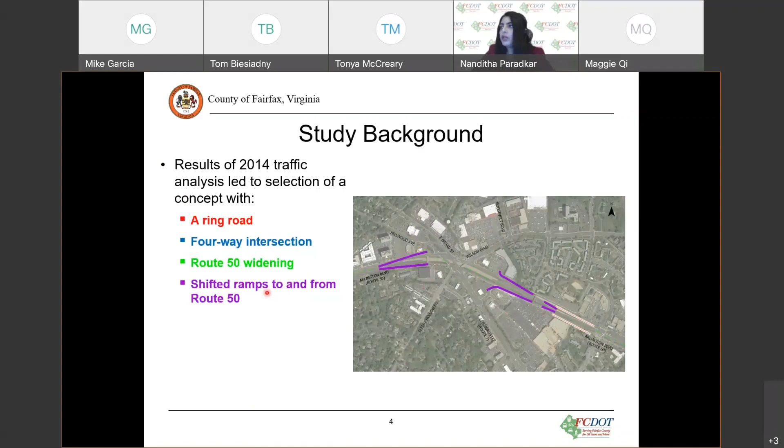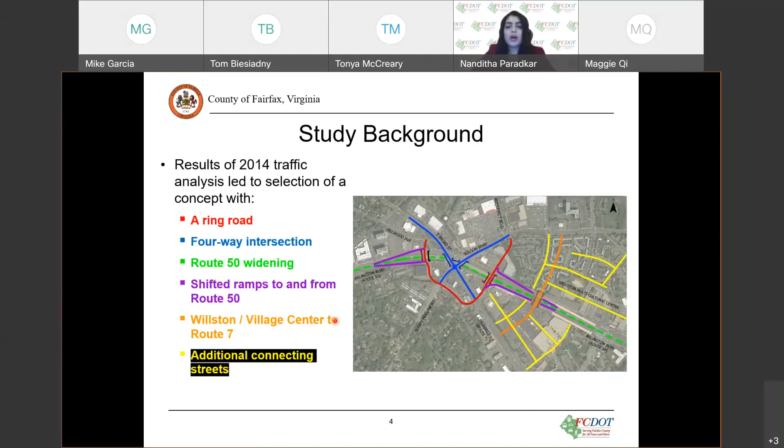Shifts that connect Route 50 to the new ring road on each side of the new intersection; construction of a new road connecting the Willston Multicultural Center and Village Center to Route 7; and additional local streets to better connect the road network with redevelopment. These transportation improvements will also provide and enhance bicycle and pedestrian facilities in Seven Corners.

The intent of the study is to find transportation improvements by looking at the interim conditions between the improvements to be constructed, assess property needs and constructability, and develop more robust cost estimates, eventually helping to enhance funding applications and continue to apply for funding.

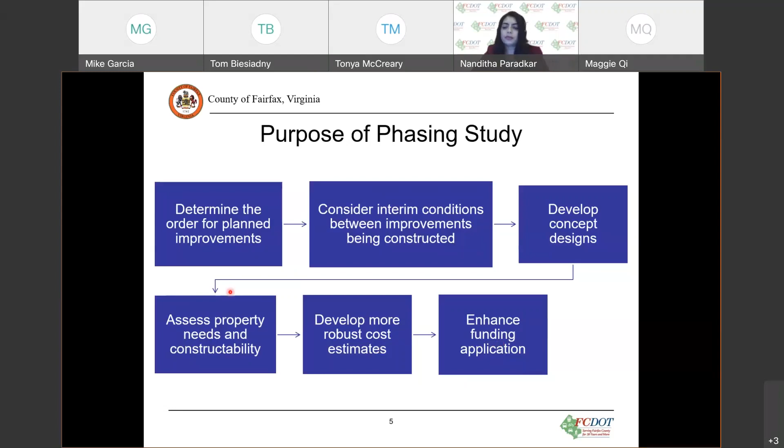The process steps to conduct the study to determine the order of improvements are to assess and evaluate travel conditions in the area for motorists, pedestrians, bicyclists, and transit users, reflecting pre-pandemic conditions. This step was completed and the findings were presented during the first round of outreach, completed in February.

The next step was to develop and analyze two future build conditions, with 2045 being the horizon year and an interim year with some improvements in place. We are currently working on that analysis and the initial phasing of improvements, which I'll be presenting shortly.

After receiving public and stakeholder feedback through this round of outreach, we will continue to develop the logical and feasible order of improvements, assess property and right-of-way needs, and develop conceptual plans along with cost estimates. The final findings, along with the preferred concept, will be presented to the public in a third round of meetings to be held in spring 2022.

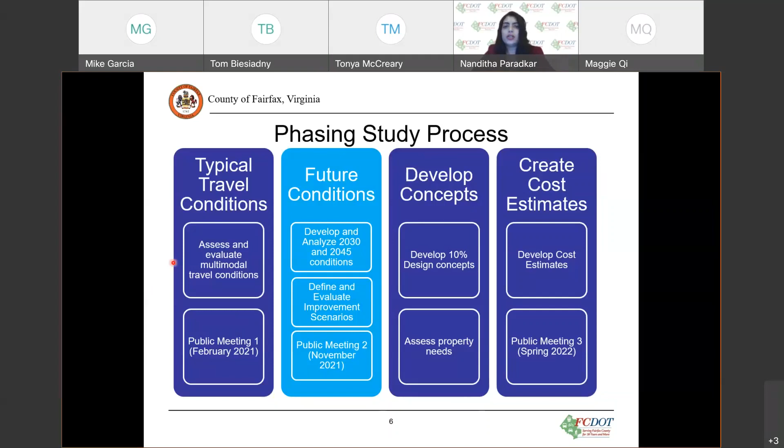The next few slides summarize the outreach from the previous round of public meetings in February. Two meetings were held, in English and in Spanish, earlier this year. The existing conditions analysis, reflecting pre-pandemic conditions, was presented.

As part of our outreach efforts, we gathered feedback about the locations and timing of congestion in the area, where people want to walk or bike, and the means to access these locations. We reached out to around 300 home and business owners, 40 religious organizations, 12 nonprofit and social service organizations, and 12 recreational centers and schools, requesting feedback through various channels including the project webpage, social media, and survey.

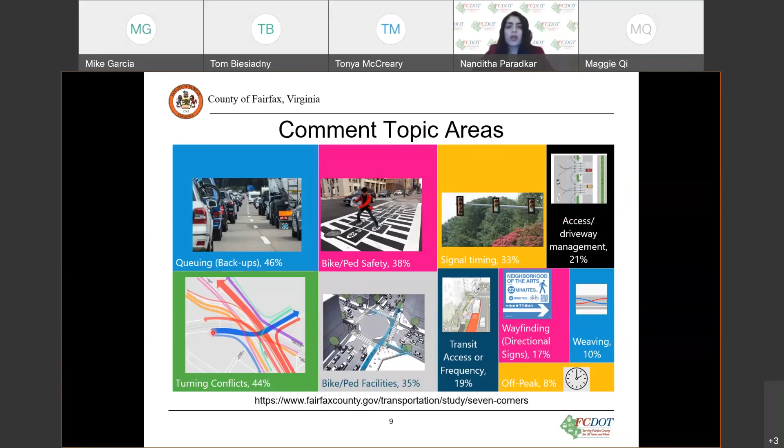There were around 38 written comments from the survey questions and online sources. Resident concerns were categorized into different groups based on these comments: queuing concerns, turning conflicts, bicycle and pedestrian safety and facilities, signal timing, extended wait times, access issues, conflicts between vehicles and bicyclists, transit frequency, unclear wayfinding and directional signs, and lane-changing issues caused by the many roads intersecting here, with the majority of concerns related to queuing and turning conflicts. Detailed outreach information is also available on our project webpage, linked here.

Here's a recap of the typical conditions analysis from the last round. This graphic shows the complicated traffic flow through the interchange area during the afternoon peak, when more people are traveling. We refer to this as a spaghetti diagram, which shows the major conflicts and converging points as you travel through the interchange. The major movements in the afternoon are westbound Route 7 towards Falls Church and westbound Wilson Boulevard to Route 50. There's also another major conflict and merge point where southbound Route 7 and Hillwood Avenue come together in the interchange area, which has one of the pedestrian paths with the longest walking times.

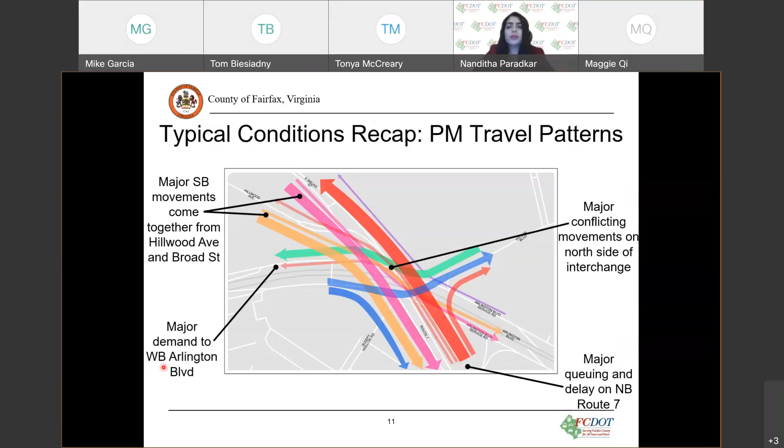With all these heavy converging movements, and people wanting to cross and waiting a long time, the ring road concept will help break down these movements by moving them to the outside, which will also help create a safer condition and minimize conflicts between vehicles, pedestrians, and cyclists, while allowing the inside four-way intersection to be more comfortable for people to walk and bike through.

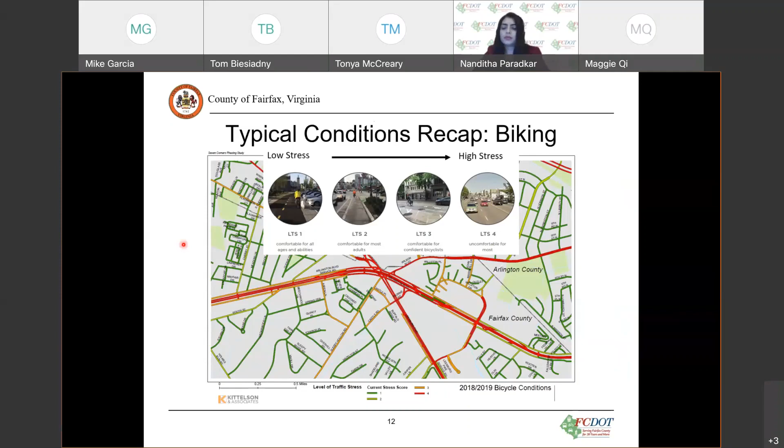Substandard sidewalks are indicative of sidewalks that are not consistent in terms of width, materials, or missing landscape buffer, or in some areas are relatively high, which increases the potential for vehicle-pedestrian conflicts along pedestrian routes. Some ADA pedestrian ramps in the area either don't meet current standards or are not provided. So the focus is definitely to address these issues as we reconfigure the interchange.

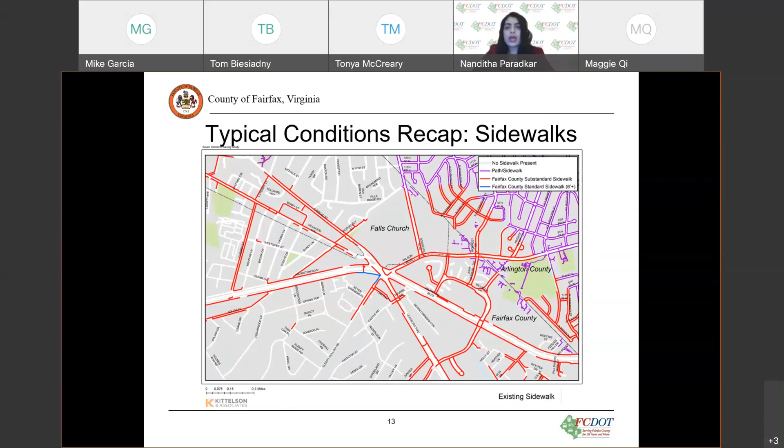Moving on to phasing concepts and analysis. Based on the typical conditions analysis, future travel demand, feedback, and constructability, we developed and analyzed multiple phasing scenarios in order to identify the most critical pieces of infrastructure to serve the community, as all of the planned improvements in Seven Corners cannot be built at the same time.

For an initial phase of implementation around 2030, one of the options we looked at is the ring road on the west side of the interchange as scenario 1. The improvements for this scenario include a ring road connecting Route 7 and Broad Street in the north, terminating at East Broad Street, with a slightly realigned East Broad Street segment.

Hillwood Avenue would terminate at Ring Road, with potential removal of connections between Hillwood and the interchange. There's a shift of the bridge over Route 50 a little to the west, and a bridge likely requiring demolition, with slightly adjusted ramps to and from 50 on the west side. We're also looking at potentially removing Castle Road access from the ring road with this concept, and we'll work with the community closely and request feedback about this possible closure.

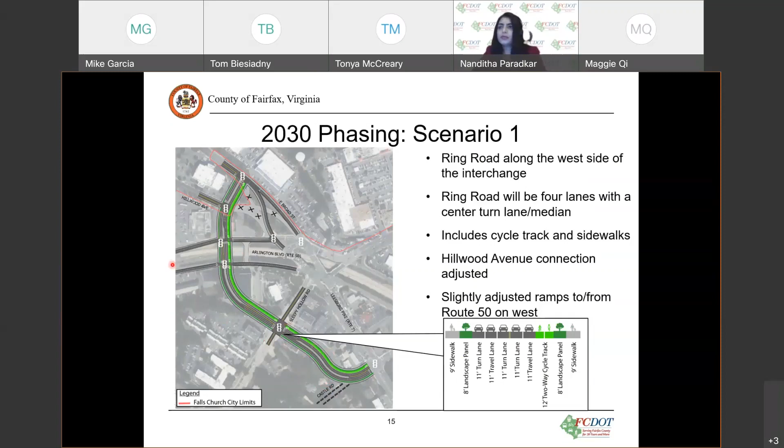Another phase for improvements we looked at extending the road across Route 50 in the southeast quadrant, with new and adjusted ramps to and from Route 50 east of the interchange. This segment would include cycle track, sidewalks, and an exclusive bus lane to accommodate Route 7 BRT, with potential extension of Ring Road to connect with Roosevelt Boulevard, but we'll keep the segment narrow and not as wide until that connection is made.

This is the Route 7 BRT implementation phase, and there are development options to help with funding for scenario 2 that aren't as available for scenario 1. This concept is also looking at potential relocation of the transit center to the west of this segment, which I'll go over in more detail in the next slide.

Considering the issue with the grade at the current location, and also the ability for buses to circulate to and from the transit center, with adjustments to the ramp accessing Route 50 on the east, we are looking at potentially relocating the transit center along the access road west of the scenario 2 segment.

There could be other locations to consider in the future, but for this location, it would be able to access the transit center from the interchange and the service road, and circulate back on Route 7 and from Route 7 onto the service road. This center will retain similar capacity as the existing location.

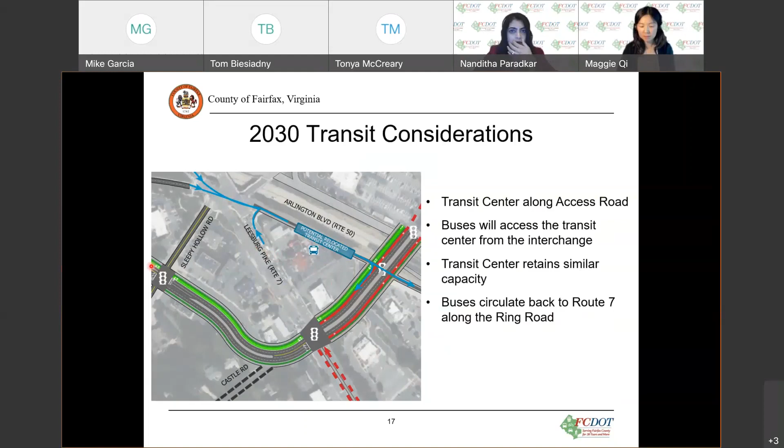Thanks, Maggie. Moving on, I did the traffic analysis for the concepts I shared earlier, and I'll go over the results now.

One of the measures we looked at to understand the impact of the scenarios through analysis is the vehicle travel times, comparing baseline, the existing configuration for the interchange in 2030 without improvements, with scenario 1 and scenario 2. We looked at some of the major improvements to the interchange area.

Path 1 is the Route 50 segment from Annandale Road to Patrick Henry Drive. It shows travel time savings of around 1.4 minutes with improvements in place.

Path 2 is the eastbound Route 7 segment going from Cherry Street to Rio Drive. It shows travel time savings of 6.3 minutes with scenario 1 and 4.7 minutes with scenario 2.

Path 3 is the travel time segment from Patrick Henry Drive along Wilson Boulevard going to Rio Drive along Route 7. It shows travel time savings of 4.7 minutes with scenario 1 and 6 minutes with scenario 2.

Path 4 is the segment on Route 7 from Rio Drive going towards Patrick Henry Drive along Wilson Boulevard. It remains the same between the scenarios.

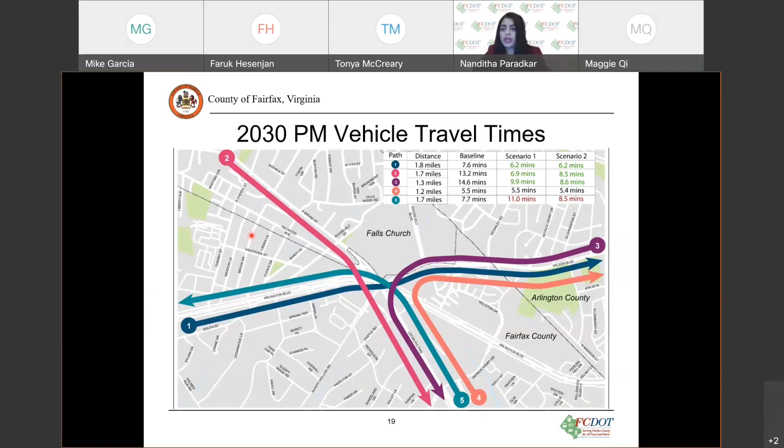Level of service is based upon the average delay that vehicles experience at a given intersection for all movements. Like in school, level of service A is the best, with little to no traffic delay, and level of service F is the worst, with very long traffic delays greater than 80 seconds at signalized intersections.

But different from a school grading system where we're trying to get level of service A, for traffic we have a different perspective, because we build infrastructure and we're trying to maximize the usage of that. So we are trying for E or better for areas such as Seven Corners and other areas in Northern Virginia. During the PM peak hour, most intersections operate at level of service E or F with delays of 55 seconds or greater without the improvements in place.

This includes intersections along Route 7, Patrick Henry Drive, Willston Drive, and John Marshall Drive, and intersections along Wilson Boulevard.

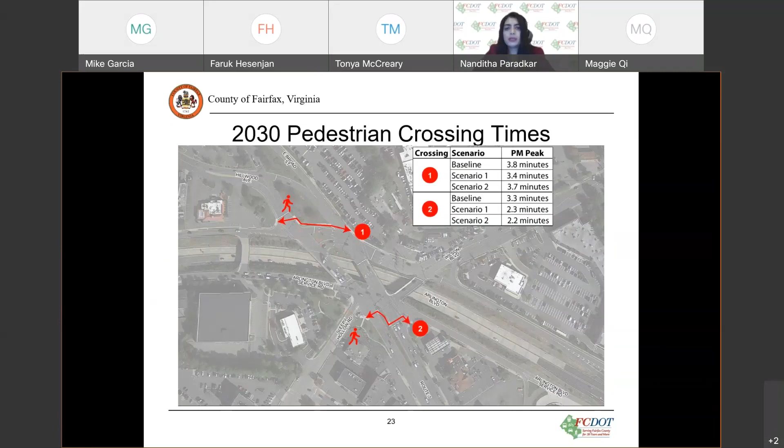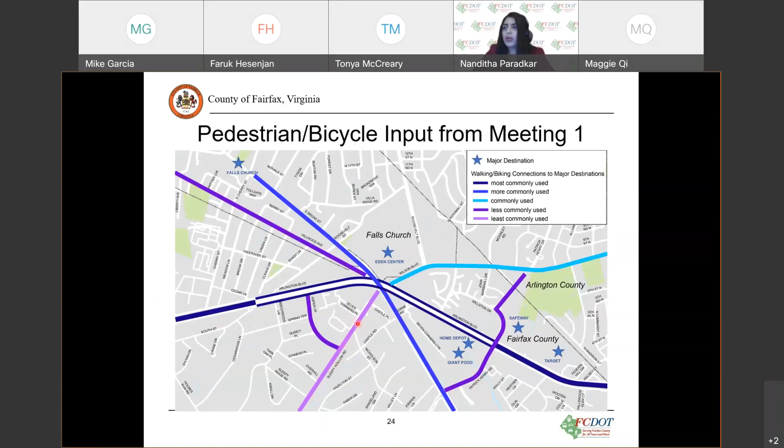Bicycle and pedestrian facilities planned along Ring Road, Route 50 and Route 7 as part of this study will be connected to adjacent facilities that Fairfax County plans in the area, which will come with redevelopment, with a separated bike lane for Wilson, and shared use paths along Sleepy Hollow Road, Patrick Henry Drive, Willston Drive Loop, and John Marshall Drive.

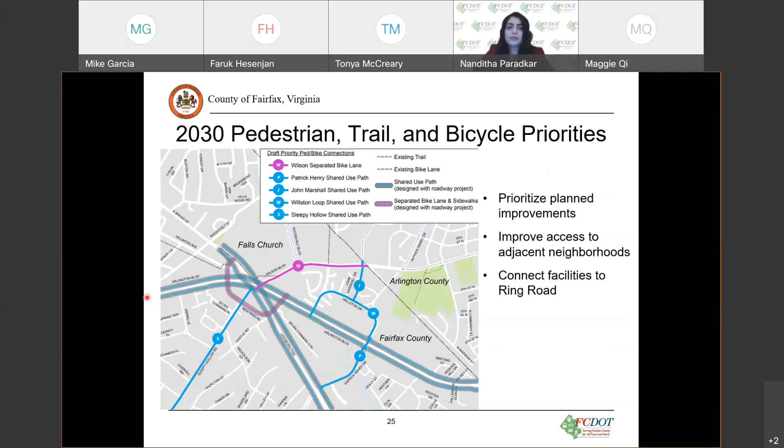Moving on to next steps and schedule. The next steps would be to identify other phases of improvements while continuing the 2030 and 2045 analysis, and identify the priority order of these improvements, incorporating the feedback gathered from this round of public outreach. We will then develop conceptual plans and planning level cost estimates. We'll look at property impacts and the cost to build each piece of the ring road.

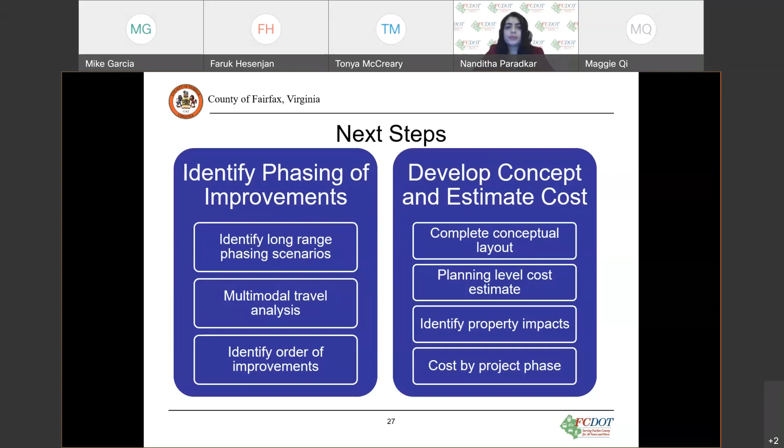We'll be looking at other possible phases of improvements as part of the 2030 analysis after gathering the feedback. We'll develop the preferred recommendation with cost estimates, and we plan to hold the third round of public meetings, as I mentioned earlier, to present this information in spring 2022. Your attending the meetings and providing feedback will help us put the improvements in order of preference and make sure we have identified the improvements that will help most people. We plan to complete the study in summer 2022.

We applied for funding with the Northern Virginia Transportation Authority, and we'll be applying for the next round of smart scale funding from VDOT this summer, and we'll continue to look for opportunities for funding so we can start to build the improvements.

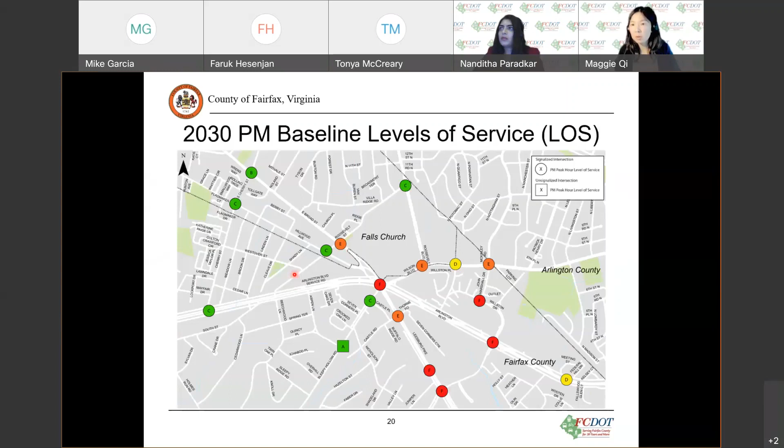Next question: would you please confirm that scenario 1 would degrade the situation from E to F at the Route 7 and Castle Road intersection, and that scenario 2 would degrade the situation at Sleepy Hollow, Castle Place, Castle Road? Can you repeat the question for scenario 1, which location you're pointing to? There's two parts. The first: would you confirm scenario 1 would degrade the situation from E to F at Route 7 and the Castle Road intersection?

Yes, I think it's right here. With the traffic coming from Hillwood and Route 7 shifting to the Ring Road, we see certain degradation here, but it's barely at the threshold of level of service F.

The second part of the question: for scenario 2, it will degrade the situation at Sleepy Hollow, Castle Place, Castle Road. We're showing from C to D. That's right, there is a little bit of degradation here, but level of service D is still less than 55 seconds of delay.

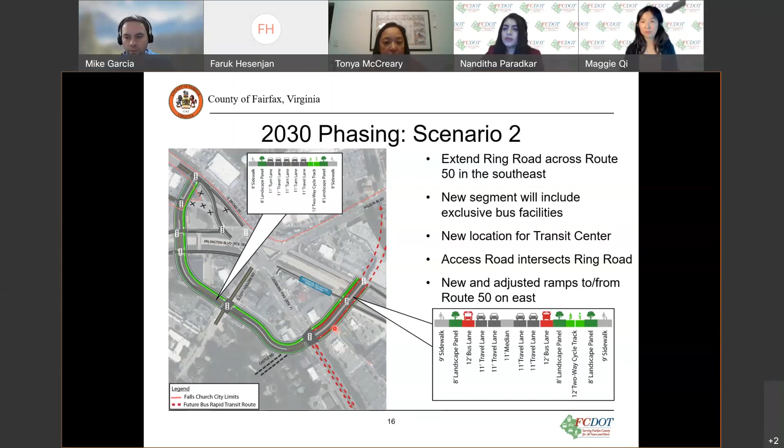I would definitely invite people to visit the study webpage. Nanditha, can you go to the last slide of your presentation? And that website, fairfaxcounty.gov/transportation/study/7-corners, is going to be the best place for you to find information about the study and the activities.

We also will post updates on our Facebook page, which is FFX Transportation. So you can find us there, or you can sign up for Fairfax Alerts. If you go to the county's website and search for Fairfax Alerts, there are subgroups where you can opt in to receive text messages or emails about DOT projects, information, and meetings. You'll see the different groups when you go to sign up.